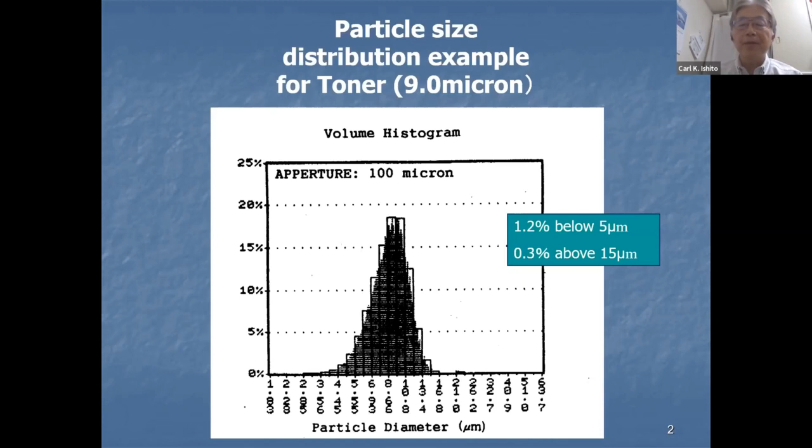Okay, to begin with, this is some example of the particle size of the toners. The average particle size is 9.0 micron, and this is our actual product with a very narrow particle size example. So below 5 microns, 1.2%, above 15 microns, 0.3%. It's a very narrow particle size.

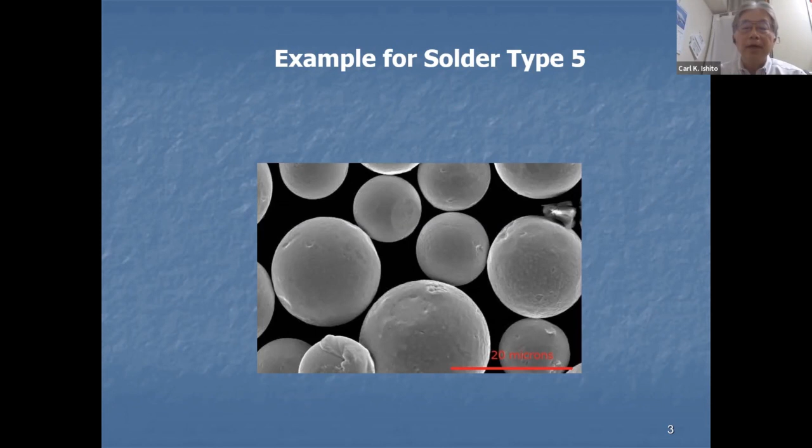And the other example is metal powders, this is an example for solder type 5. Solder is, as you know, used for electrical systems and many electrical equipment, and so solder powder is used in a manufacturing process.

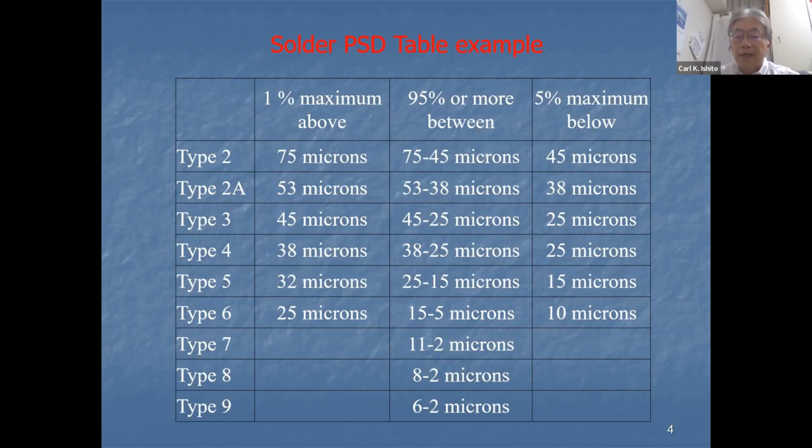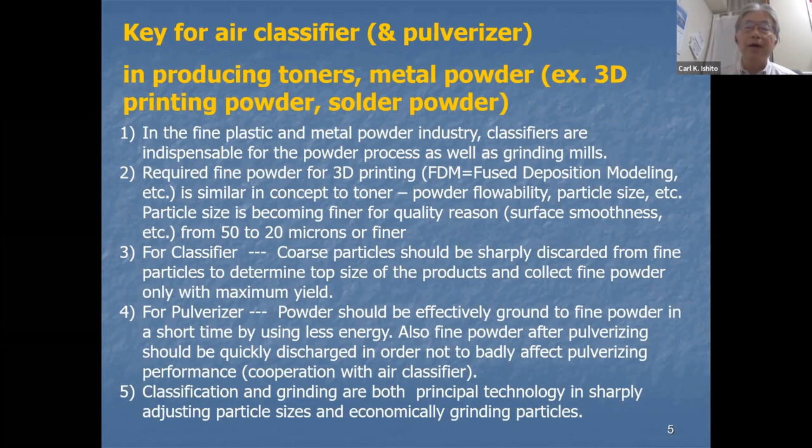This is generally air classifier technology, generally used for the fine powder field, especially in the less than 10 micron fineness range. But recently, sieves are used now for this type of very fine powder, in the 10 to 20 micron range.

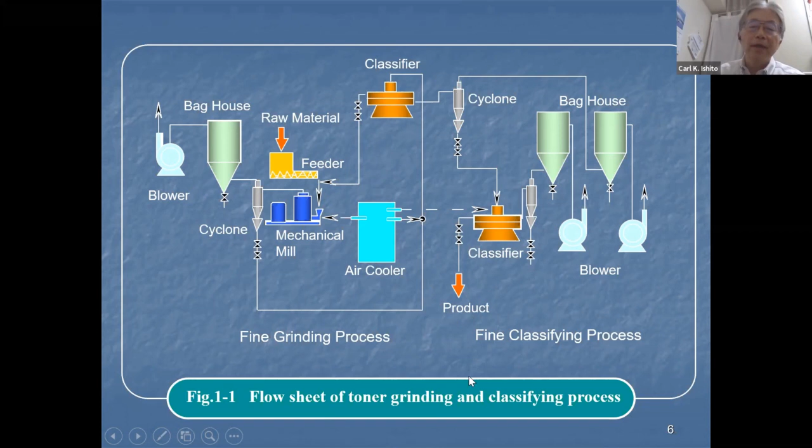So product size after removing coarse and removing fines - this is the removing fines side - and the product with narrow particle size is collected. This is the toner process.

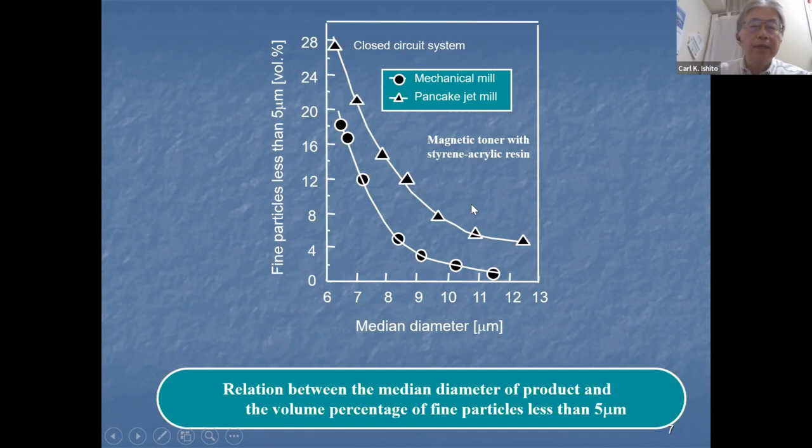So by using a mechanical mill, less fine powder is generated than with a jet mill. That's the toner case, and the next one is magnetic. So product yield is also different because of the fine powder.

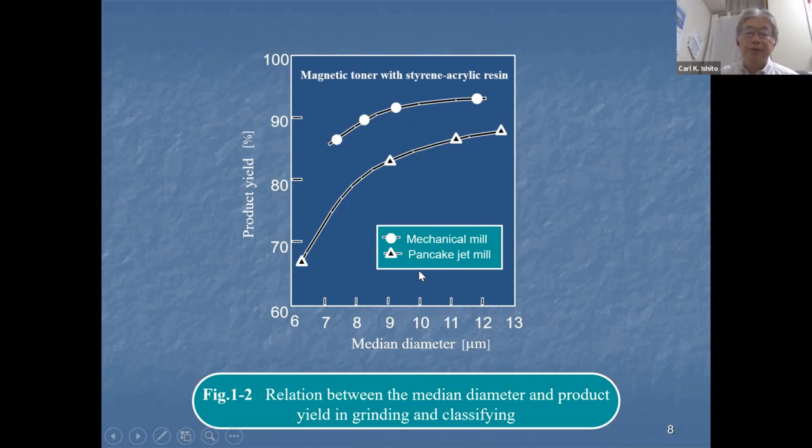And another point, specific energy consumption is also different. Mechanical mill generally shows less energy than the jet mill.

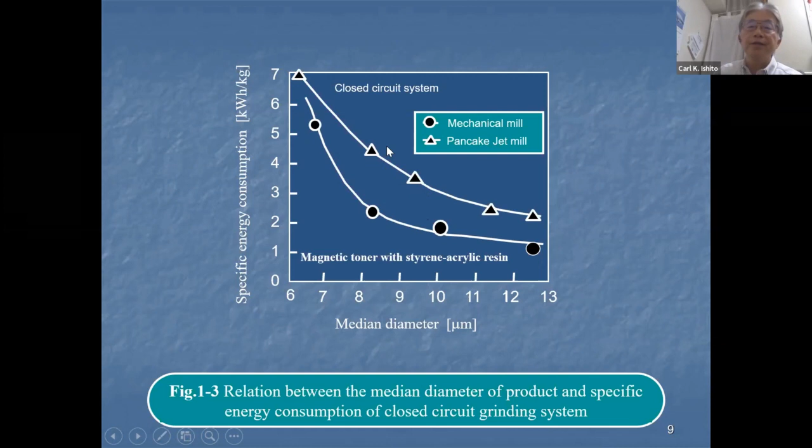And regarding the toner shape, there are several factors, and in case of using surface shape factors, this is our definition.

Perimeter squared, divided by 4 pi times area. This is the surface shape factor. So a smooth and rounded surface shape is 1. This is the spherical case shape.

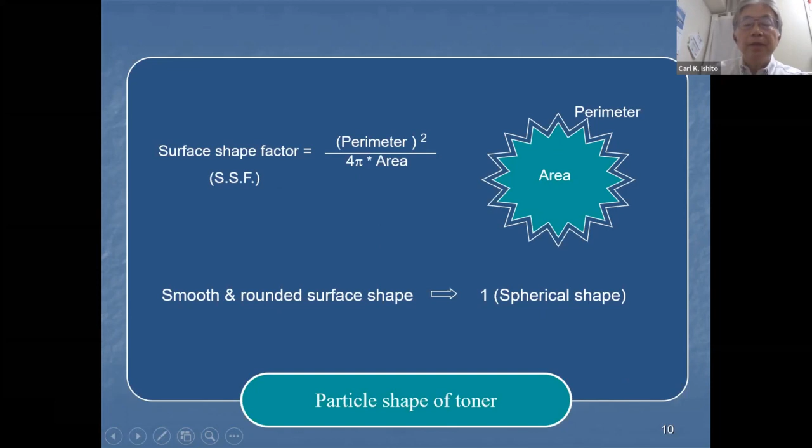If we use surface shape factors, this is our actual photograph. Surface SSF shows 1.41 after the jet mill is used.

The other jet mill also produces this type of shape, not round, because of the shape. But with a mechanical mill, it's a little bit more round shape. Because of the round shape, this factor is close to 1, meaning it's close to a round shape.

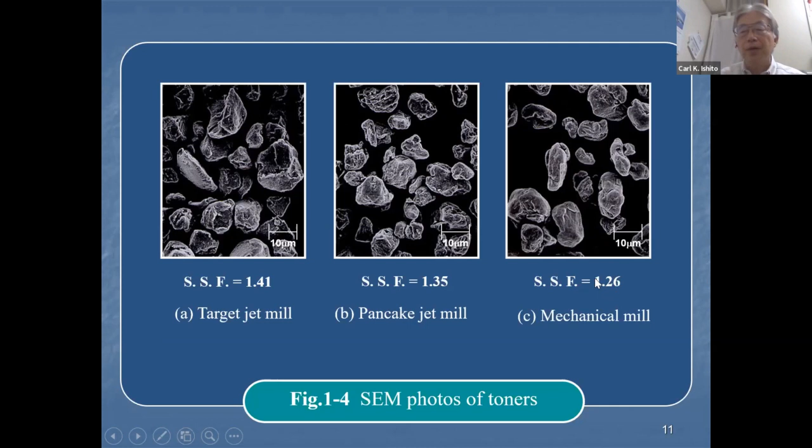So there are several classifiers. A classifier - there are so many classifiers. Rotor type - this is our AccuCut rotation type, and Microcut. The rotor is inside, and also micron separators.

There's a top rotor type, where the rotor is on top, and the Elbow-Jet does not use any rotor inside. By using the Coanda effect, powder can be separated into 3 fractions at one cut. This is a unique air classifier.

And the Microspin is used with a jet mill. There are several types of classifiers.

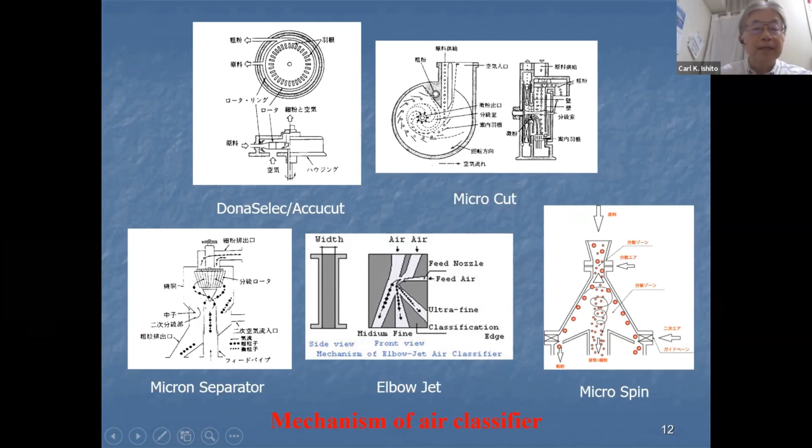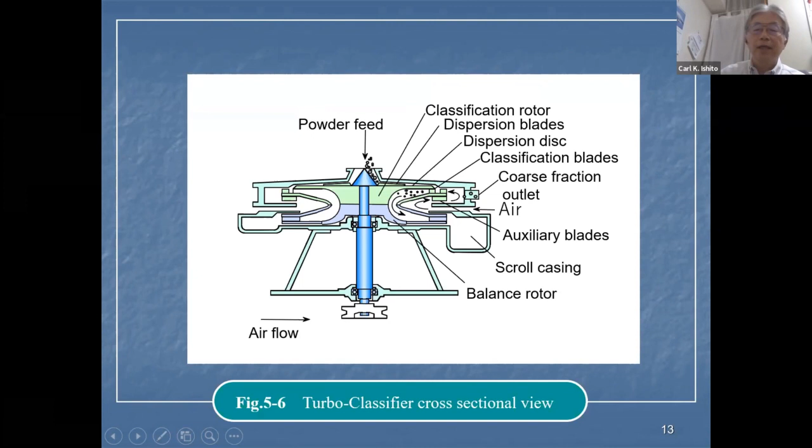This is one example of the turbo classifier, a cross-section view, with rotors - the classification rotor and the balance rotor inside, rotating at very high speed. Coarse powder is driven out by centrifugal force, and fine powder is driven in by drag force. So by changing rotation speed and airflow rate, the cut point is adjusted from fine to coarse. That's the concept of the turbo classifier.

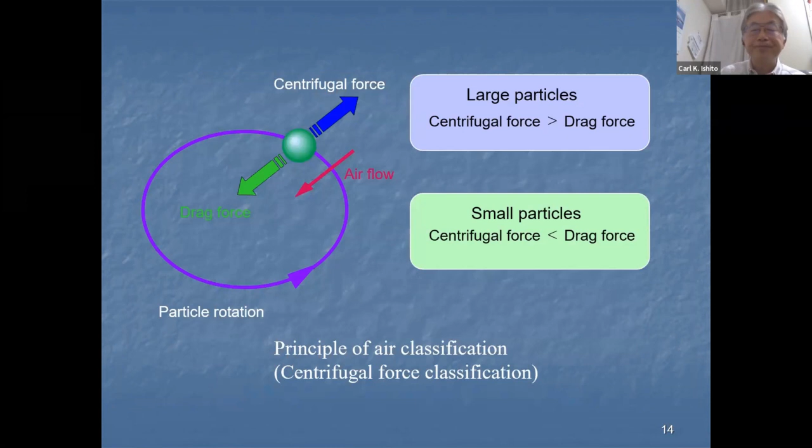So this is the principle of air classification of the rotor type. And the Elbow-Jet air classifier is different - this is the Elbow-Jet.

Powder is fed with a feed air, and powder is classified into fine, middle, and coarse - 3 fractions: fine, middle, and coarse. This is done with no rotor, just using the Coanda effect.

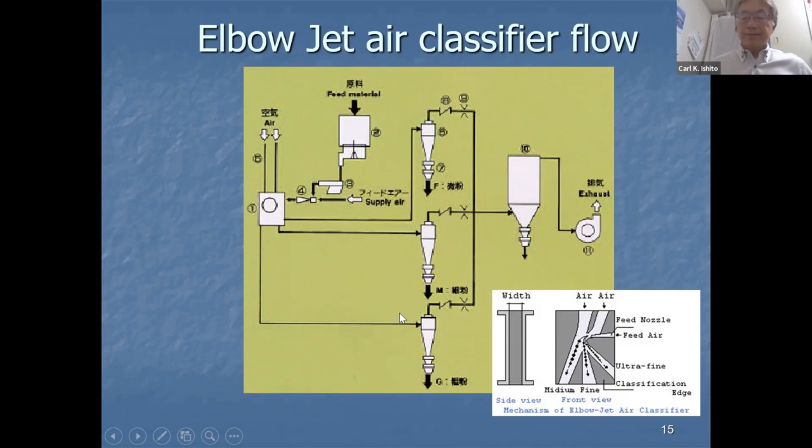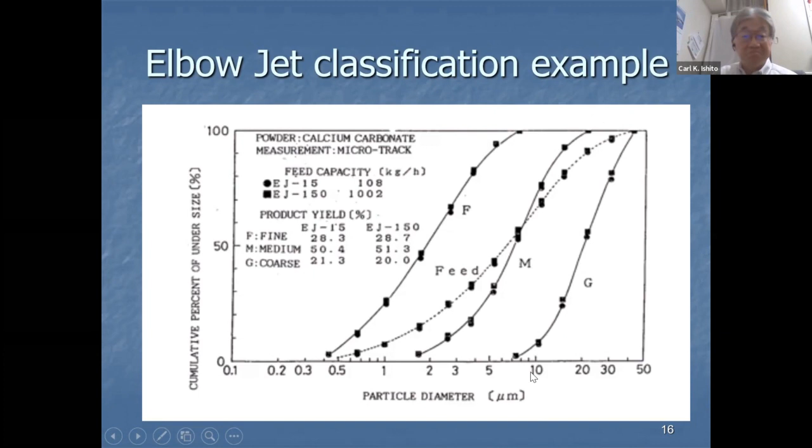Feed capacity can range from low feed rate to large flow feed rate. Of course, depending on the model, small to large, the produced particle size distribution is very equal. That means scale-up is very successful.

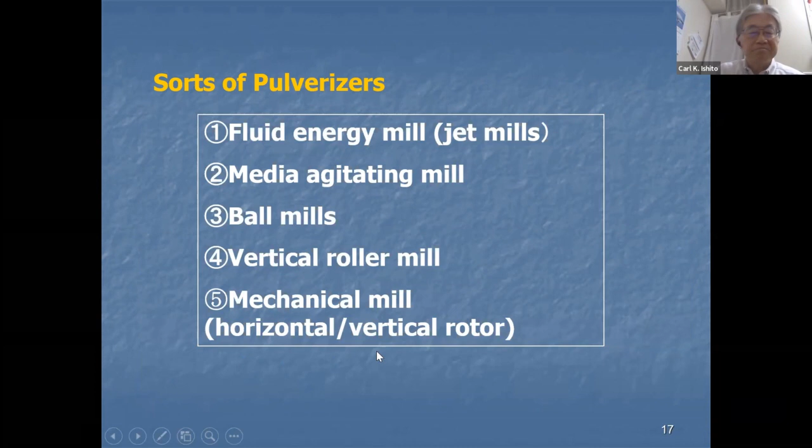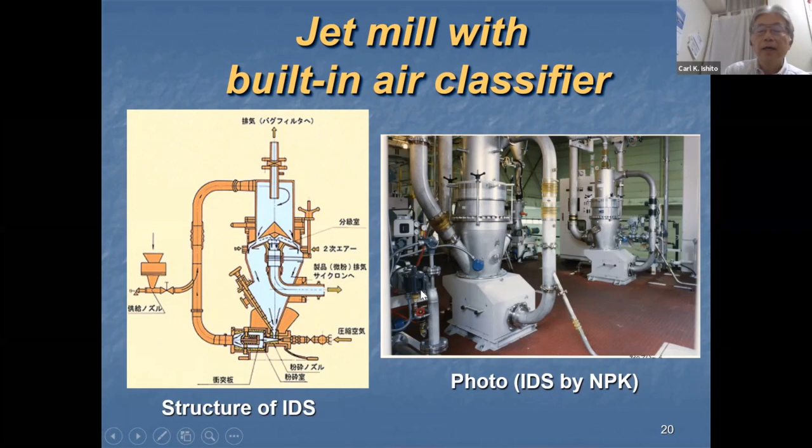There are also other pulverizers: fluid energy mill, agitating mill, ball mill, vertical roller mill, mechanical mill. Today I'll just show the photos. These are the jet mills of NPK, this is our Nippon Pneumatic example, and this is our turbo mill by Freund Turbo Matsubo manufacturing. These are mechanical mills, and this mill can be used with a jet mill, elbow jet air classifiers.

This is a classifier part, and this is a grinding machine part. This is a closed circuit pulverizing and classification system.

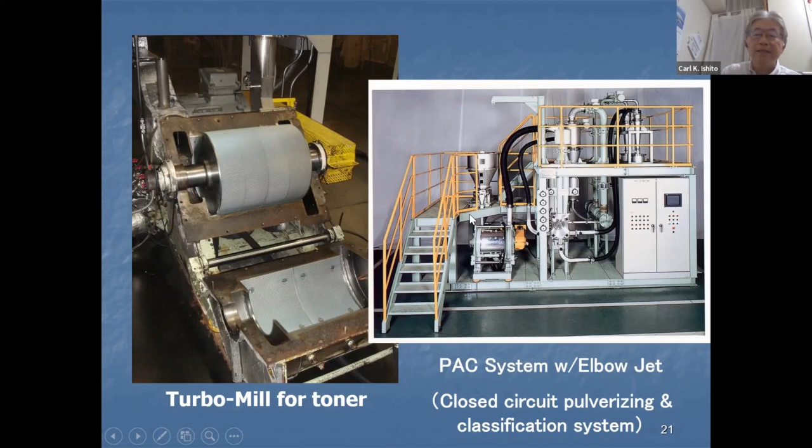In a mechanical mill, this is the cross-section view. Powder comes in from the bottom and goes through between the rotor and the liner. Both sides have grooves, and the powder is pulverized there.

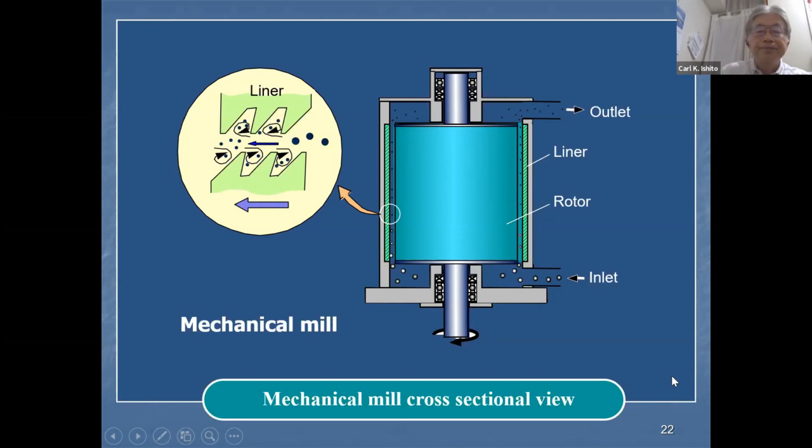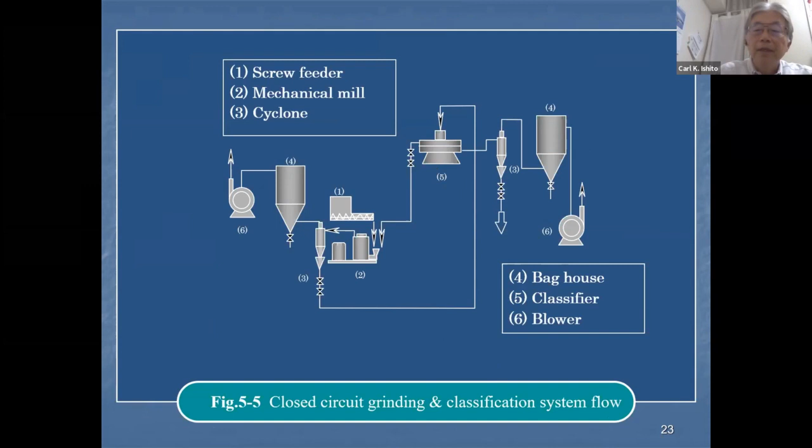This is our same flow scheme system flow, so let's skip that. Now, classification efficiency index.

Let me explain the classification efficiency index, which we call kappa, similar to K. It's calculated as dp25 divided by dp75. The particle size distribution looks like this: this is the feed, and after particle classification, the fine powder yield and coarse powder have this particle size distribution.

If we calculate partial separation efficiency, in the feed, 50% of the powder goes to the fine side and 50% goes to the coarse side. We call this the 50% cut point.